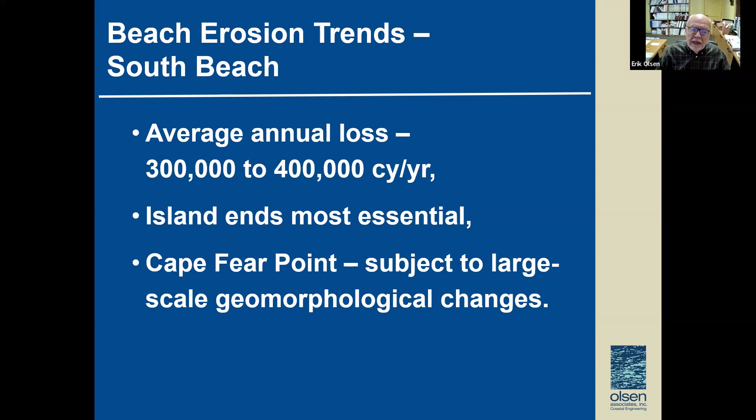Both ends of the island are the most essential, historically have been the areas of interest where we've had to evaluate erosion control. Cape Fear Point being the most recent, and the changes there are natural. They're very large scale, and they're what we call geomorphological changes, which have to do with the morphology or the geology of not only the landform itself, but in this particular case, Frying Pan Shoals. Next slide.

Just to give you a little bit of history as to why we've had changes on the island. Most of this has to do with the initiation of the Federal Navigation Project through the Cape Fear River. In the 1800s, the project was initiated, but before it was initiated, we literally had a sand sharing system that existed between Oak Island and Bald Head Island, which you can see here, which is denoted by the very shallow shoals. And again, on the right-hand side, you can see that the shoals have been diminished over time, both naturally and through man-made operations.

For example, the maintenance of the channel itself. Historically, before about 2000, all of the material that came out of the channel in order to keep the federal navigation project navigable was taken offshore and was dumped. And so there were several tens of millions of cubic yards that were taken out of the system by the federal government prior to 2000. Next slide.

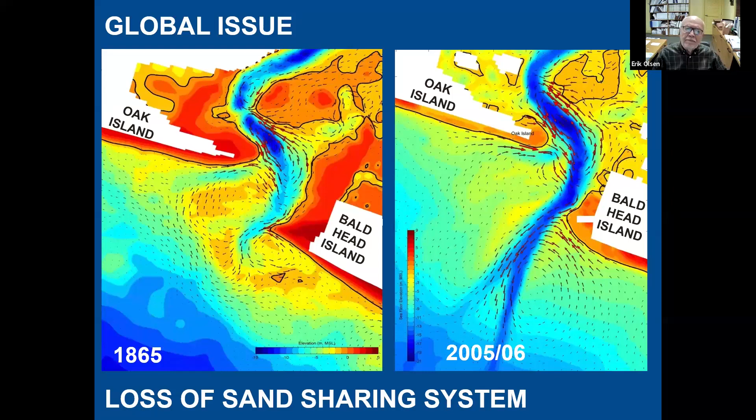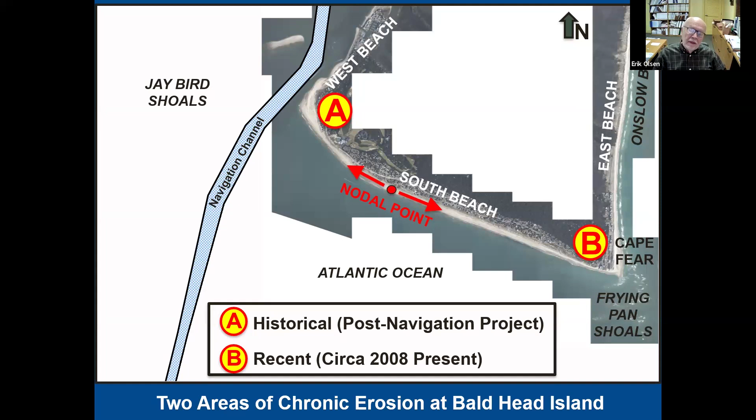So if we look at the conditions today, historically, the area of interest has been in the vicinity of the navigation channel. That's because we have both natural and obviously man-made changes at that location. More recently, since about 2008, we have been suffering an erosional hotspot on the east end of the South Beach, literally at Cape Fear. Next slide.

On the west end, obviously, over time, there actually were structures that were lost, including a former club facility, in addition to a number of homes that were either lost or relocated more landward. Next slide.

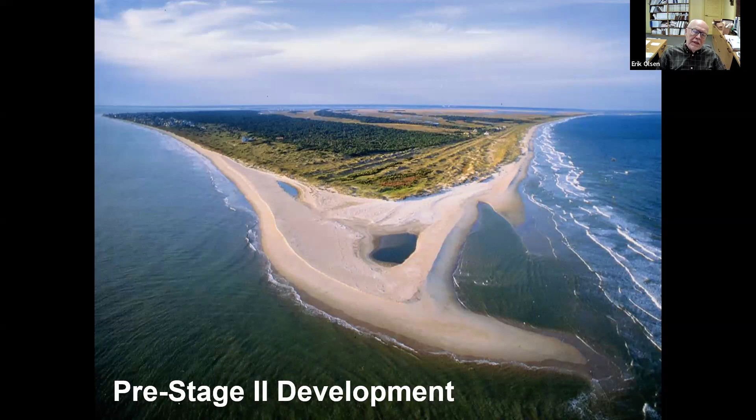On the east end, prior to the development of the club, we had a very anomalous accretional formation, which looked like this, which has disappeared over time. It's a morphological change associated principally with whether the Frying Pan Shoals formation, which extends from here offshore, extending 30 miles southward, whether that formation attaches to the land or tries to attach to the land, or is segregated from the land due to a marginal flood channel, which becomes deepened over time during storm events. Next slide.

Well, just to give you again an overview, which most of you know, with respect to the large-scale benefits of either nourishment constructed by the village or disposal events, which is tantamount to nourishment that occurs as a result of the U.S. Army Corps of Engineers placing sand on South Beach derived from the maintenance dredging of the navigation project.

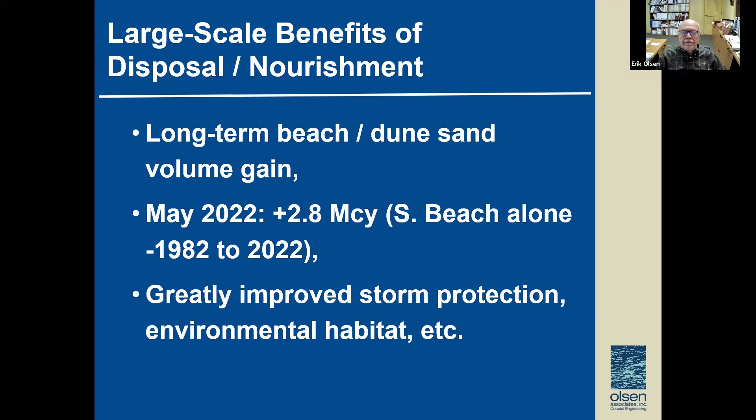So if we map the infusion of sand over time, as represented here from the beginning of about 2001, which is when the Corps of Engineers performed the last channel deepening, a large quantity of sand, almost 1.6 million cubic yards, was placed on South Beach from that construction. The remainder of the construction volume went to Oak Island.

So what we do is we map the volume of sand in the beach. You can see that over time it degrades, and then it jumps up again with some type of infusion, be it either a federal project or a village project. The most important thing to take away here is the fact that this whole trend is moving up.

And that's the sign of a very successful beach nourishment project or beach management program, where the quantity of sand in your system continually increases because you're putting more sand into the system than you're losing, either naturally or through man-made features such as sand loss to the navigation project.

Included in that are, of course, the terminal groin construction and also the reconstruction of the sand tube groin field, all of which helps maintain the sand on South Beach, particularly at the west end of South Beach in proximity to the navigation project.

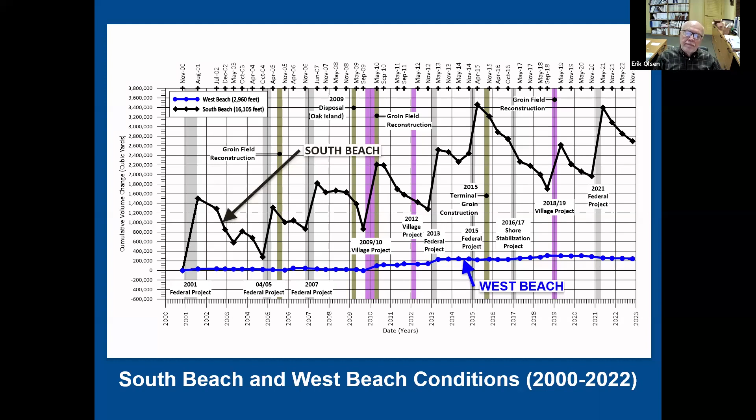So as Chris noted, we have a fairly in-depth sand management plan here, which is probably attributable to the Wilmington Harbor Sand Management Plan, which began in 2000 as a result of, quite frankly, the Village of Bald Head Island's insistence that sand management had to occur in the future. That is to say that sand could no longer go offshore and it had to be put back into the system of the two barrier islands that border the navigation project.

So the federal project was the genesis for your beach nourishment project, which began in about 1982. And over time, as we'll show you in a second, a schedule for sand placement has evolved. Now, simplistically, we've alluded in the past to the fact that your management plan is akin to a three-legged stool. One leg is structures, another leg is federal disposal of sand on South Beach, and the third leg is local nourishment, or projects constructed by the village itself as required. Next slide.

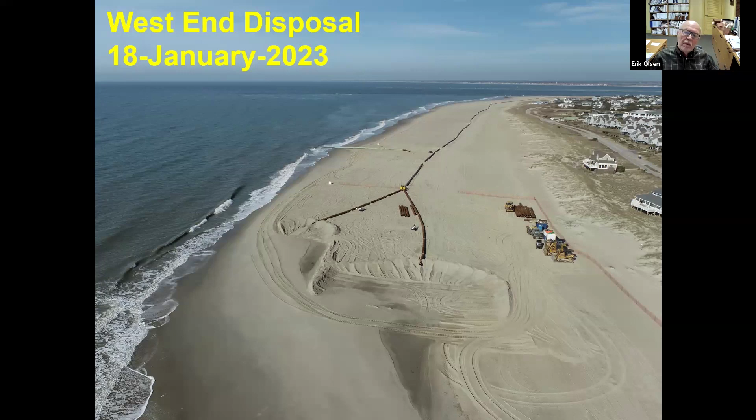This is just a view of the way that the sand is dredged. This pipeline extends back to the navigation project, and you see here the type of process that's used to construct the berm on either the federal project or even your project. It's basically identical. So the beach is extended seaward some distance, depending on whether it's a federal project or it's a local project. And once that seaward berm is met, the berm then extends in an eastward direction. Next slide.

Now, with respect to how far this sand goes, historically, due to the design of the federal project, they only get about 60% of the way down the shoreline towards Cape Fear. And again, the reason for this is that they maintain the least cost methodology with respect to the government budget available. That is to say that to place the sand further to the east would cost more money, and their charge is to do the maintenance dredging in the least cost manner possible.

So their goal is not to construct beach nourishment here. Beach nourishment is a sidebar. Their goal and their charge with respect to Congress is to maintain the channel, and so the least cost methodology is utilized with respect to disposal.

Now, there's one occasion where actually sand was placed all the way to Cape Fear. And that was back in 2001 when they did the channel deepening project. And so by design, and by the insistence actually of the Village of Bald Head Island Council at the time, the fill extended all the way to Cape Fear, all the way down basically to the club. There's actually a story with that, but I won't go into it because it almost did not occur.

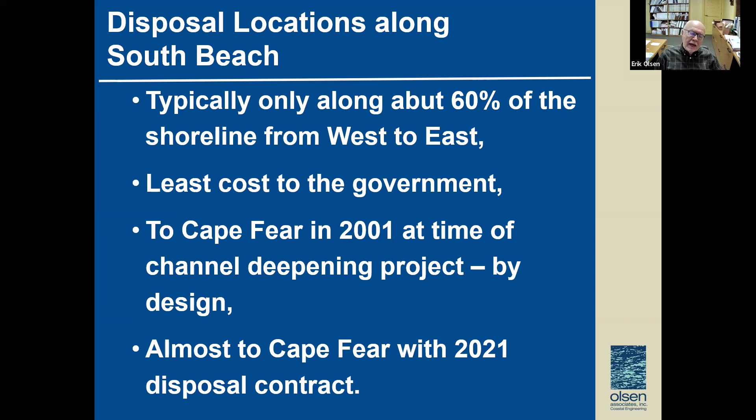But the village politically insisted that the Corps meet that goal because they had alluded to meeting that goal in the planning of the project in the early stages. In 2021, the navigation channel had more than 1 million cubic yards available, almost 1.5 million. And so the Corps did extend the disposal at that time. It almost got to the club, but it petered out just before that. Next slide.

Coming up is the next village project to be constructed on the west end of South Beach, basically in 2025. There are two other actions here that are being addressed. One is to replace the sand tube groin field, which we normally do about every 5 to 6 years because the ends of the tubes wear out due either to impact from boats or just natural erosion of the tube itself due to its being in the active surf zone. And also an attempt to address the chronic erosion at the eastern part of South Beach near the Shoals Club. Next slide.

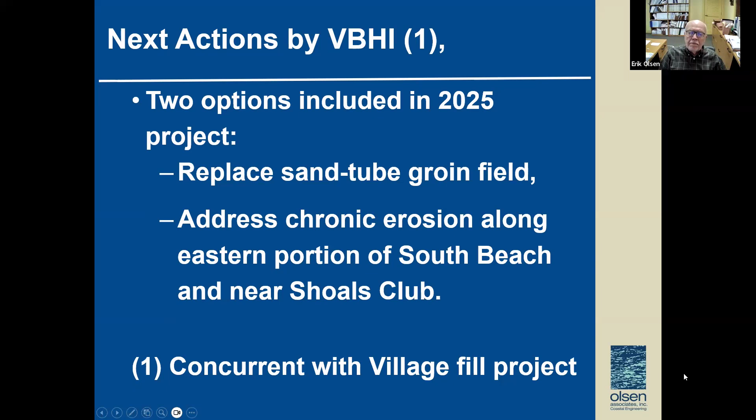Now, the sand tube groin field functions actually in concert with the terminal groin, and it protects both the road and the infrastructure at the point on South Beach where there is curvature in the shoreline, where, associated with that, there's actually an accelerated sand transport. So the goal of the sand tube groin field is to slow down that sand transport, to keep a dune in place, and to protect both the infrastructure and the road itself. And of course, there is subgrade infrastructure in proximity to the road.

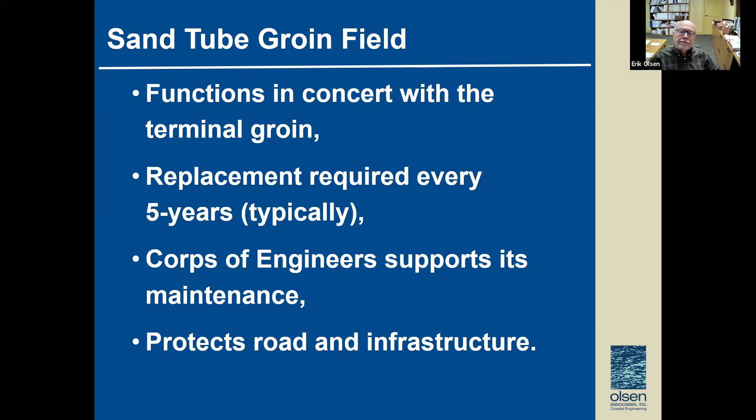This is an action that is supported by the Corps of Engineers because they know that when we slow down the transport of sand in this vicinity, it reduces the maintenance of the navigation project. Next slide. Next. Oh, sorry.

The construction of the groin field is pretty unique, and that is to say that it's constructed in the dry. That means that we really can't construct these sand tubes out into the ocean in the manner that we'd like. So every time it becomes time to episodically replace the groin field, it's done in concert with a beach fill. And as you'll see in the next slide, we literally excavate out the old groin and replace it with a new groin, new sand tube in the dry, and then we bury it.

We're back to utilizing Jaybird Shoals borrow site. And there's a story with that we'll get into in a second. But that's a necessity, particularly if the village is building their project, in order to build a beach fill sufficient to replace the groin field. If the Corps of Engineers is not doing it, then the village is required to do it. And part and parcel to that typically is the replacement of the sand tube groin field.

So in order to do that, we obviously have to have a competitive situation for a dredging project. And all of these actions, both the beach fill and the groin field, are permitted functions or features. Next.

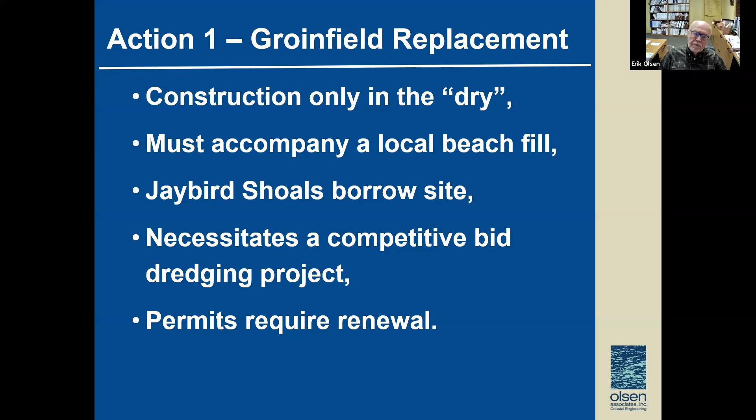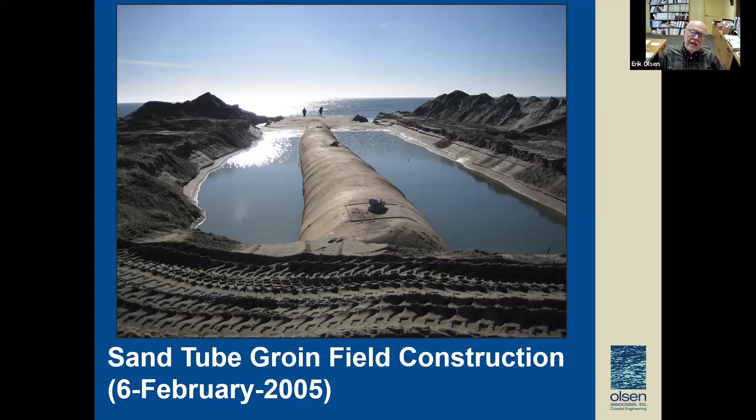So again, this is a view of the tube itself once it's exposed. This is a new tube that's been constructed. You see it's in the dry, although the water is pumped down as required. It's the water table you see there. It's pumped down as necessary to implement the construction of the groin. Once the groin is constructed, we backfill it. It's covered over. You don't see it. The only thing you see, usually a year or so after the fill has been placed, is the tips of the groins will then become activated. Next slide.

So the second action that we're talking about here is the consideration of placing sand near the Shoals Club on the east end of South Beach. We're attempting to do this in a manner whereby when we go to bid for a dredging project, we will have a base bid, which will be the west end of South Beach. And we'll have two options for placing sand on the east end of South Beach, which gives the village council the ability to control costs.

Now, in an ideal situation, we had intended to use Frying Pan Shoals for this particular project and for the upcoming sand placement on Bald Head Island. We actually initiated, as you'll see in a minute, permits almost 8 years ago in order to do that. And the reason we wanted to go to Frying Pan Shoals is, one, it's an infinite source of sand. Someone has computed that in its entirety, although we would not dredge large distances within Frying Pan Shoals, there's like 1 billion cubic yards of material out there.

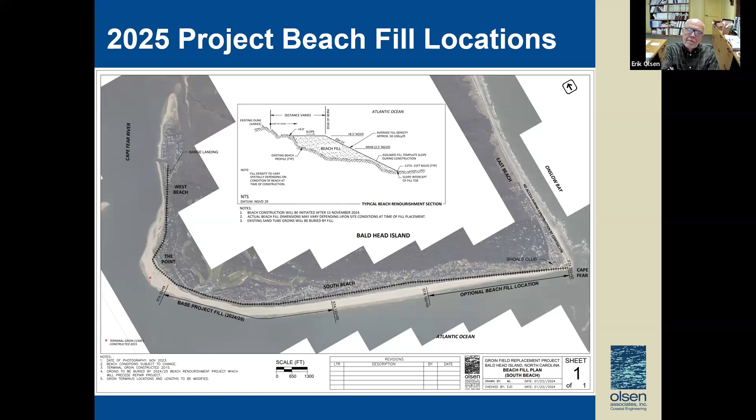Next slide. So what we were told to do in the permit process, when essentially we determined that the fisheries groups were going to oppose Frying Pan Shoals, we were told to go back to Jaybird Shoals. And the nuances associated with that sand are twofold. One, it's a finer sand, much finer than Frying Pan Shoals. And so we're back to placing a material which is slightly less desirable or less optimal compared to the Frying Pan Shoals material. And also the additional costs associated with the pipeline length.

So we're dealing with several miles of additional pipeline, which figures into the options and figures into the costing of those options. And it's not just the pipeline length itself, but as you might imagine, the longer the pipeline gets from the borrow site to where it's being placed on the shoreline, the lower the productivity of the dredge because of just the frictional aspects of the pipe itself and the sand and the effluent going through it. So the productivity of the dredging contractor goes down. That's to say the number of cubic yards he can place per day goes down, and effectively the cost then of each cubic yard goes up. Next slide.

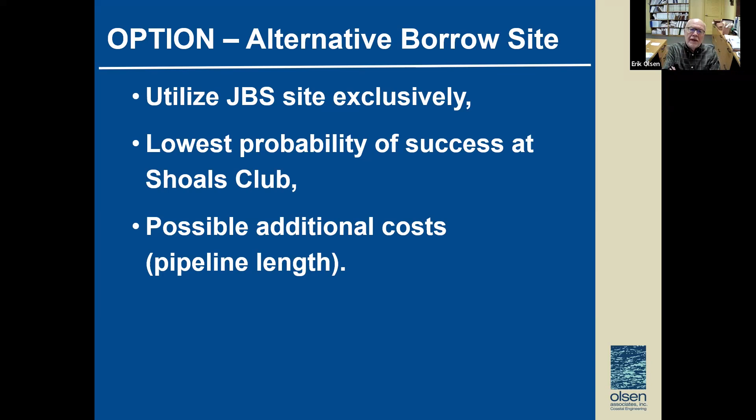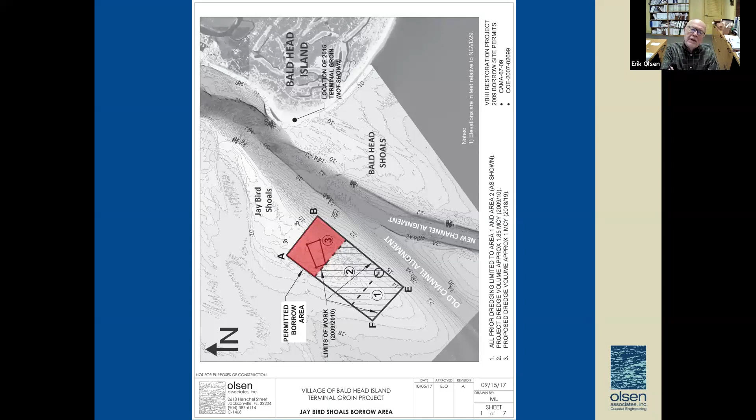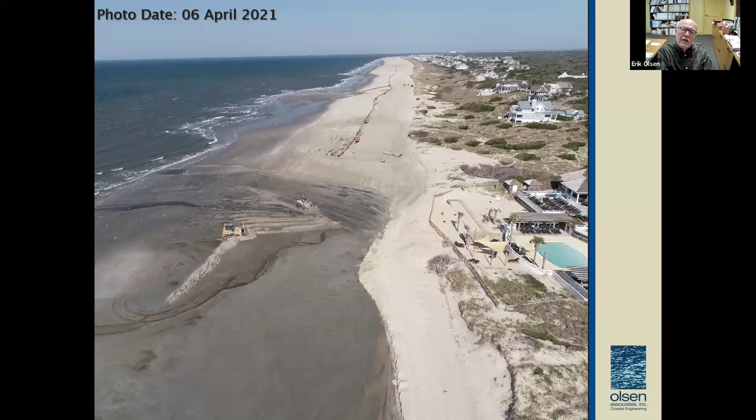This is a view of how far the Corps got in '21 with their maintenance dredging project. They almost got to the Shoals Club, but not quite. And so this is essentially how it ended up. You can see here the contractor trying to push up material towards the dry beach, which he effectively did. But the fact of life is that the material that was placed here came out of Bald Head Reach 2 and is the finer material that comes out of the navigation project. So besides the shortcoming, we also had material that was placed with a very fine grain size, which again portends poorer performance with respect to nourishment. So even though material was pushed up here in the short term, that material was not very long lasting. Next slide.

So the rhetorical question that has continued to come up: what are the options for solving the problem at the Shoals Club and the Cape Fear vicinity? Well, one potential option is the channel maintenance that is performed every 2 years and is placed episodically on Bald Head Island. The way that would occur, which means that the Corps, instead of placing all the material on the west end of South Beach, would place some on the east-south end of South Beach, will require negotiation and some form of contract between the village and the Corps, with the village being responsible for paying for any delta costs. So instead of the least cost option being constructed, there will be another option constructed whereby there's an additional cost, and that cost would have to be defrayed by the village. And the village is presently in the process of trying to negotiate such a flexibility into the federal contract.

Another upcoming event, which we don't know when this will occur, is the planned harbor deepening and the expansion of the navigational channel in proximity to Bald Head Island, both vertically and horizontally. So what that means is that when they deepen the channel, just as in 2000, there will be a fairly large quantity of beach quality sand available for placement on Bald Head Island and/or Oak Island. And so at that point in time, depending on the volume available, there may be availability of getting sand all the way down to the east end of South Beach, similar to what occurred back in 2000 with the last deepening project.

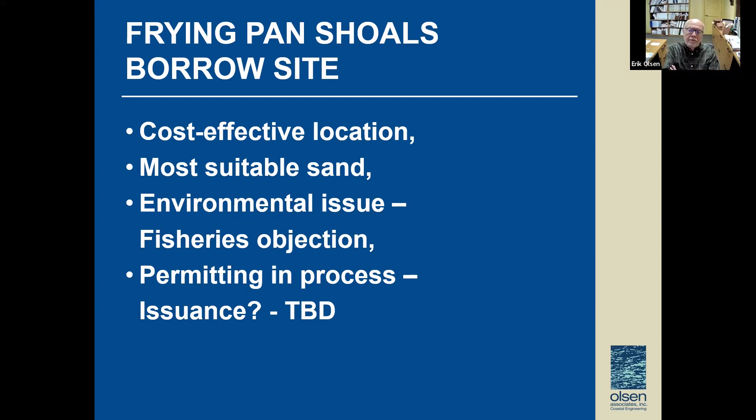And so we intend to go back into the process of reinitiating the permitting. At the present time, we were forced to terminate the permitting of that and to renew the permitting of Jaybird Shoals. Next slide. Can you give us a little more insight into what the objection from the fisheries is?

Well, they believe that it has, and again, I'm the engineer, not the environmental guy. They tend to believe that it has unique attributes with respect to certain types of fisheries during certain times of the year. It's not well explained. Quite frankly, we believe that what they don't want to do is open Pandora's box with respect to utilizing either Frying Pan Shoals or any of the other two.

There are 2 other headlands in the state which have very similar formations to Frying Pan Shoals. And even though I believe the legislature has indicated that these should be evaluated for purposes of sand resource, they believe that these areas are unique. They do not have any quantitative information. Matter of fact, the village volunteered to generate quantitative information to address their concerns through environmental monitoring, through fishery counts, things of a nature that you would do when there's some objection that is not well quantified. But they wouldn't have it.

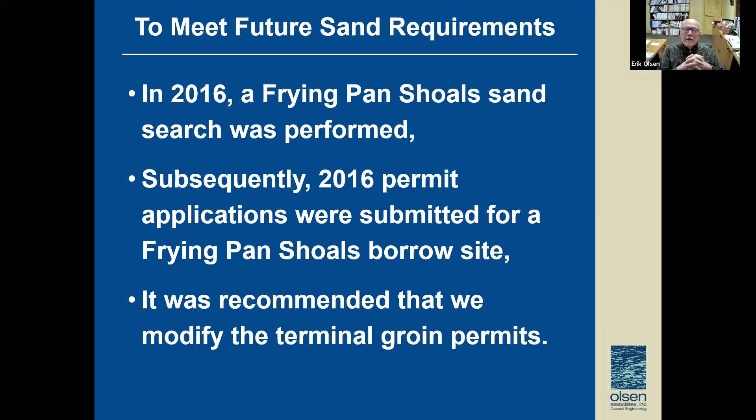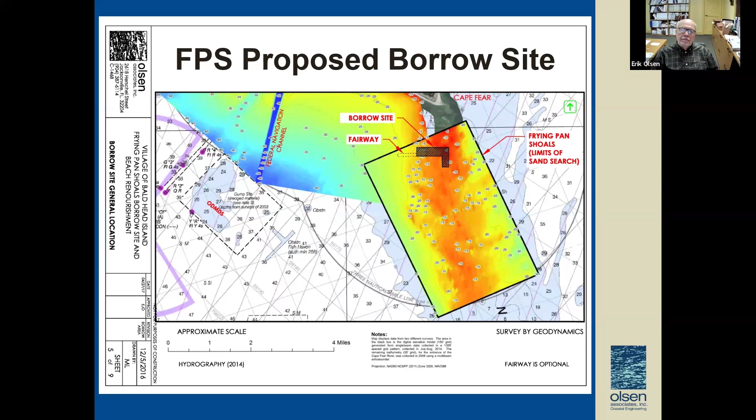So other actions considered by the village. There's been discussion over the years to potentially convert the sand tube groins to rock structures, which at this point in time is not allowed by law. And also to construct some form of a structure at Cape Fear, such as a small terminal groin or perhaps several small groins, to impound sand and to keep sand on the beach in the vicinity of the Shoals Club.

And again, legislatively or permit-wise, regulatory-wise, neither of these is allowable. So at this point in time, they cannot be permitted. The feasibility of either action is not only questionable, but it's impossible. Now, with that said, the village is taking proactive measures to try to initiate legislation that would allow for these type of actions. And Charles Baldwin of Brooks Pierce is heading up that effort.

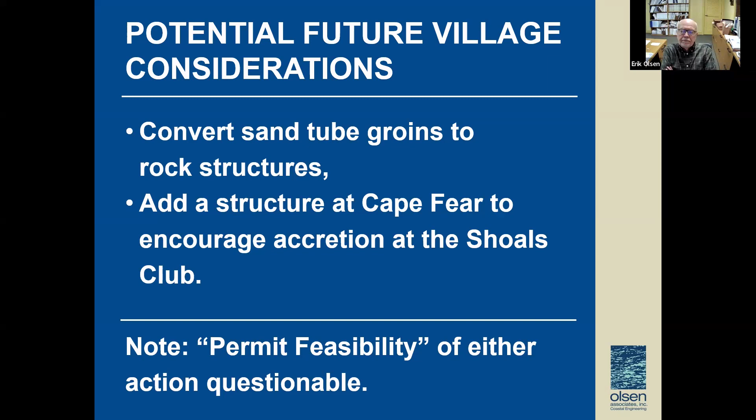It did not get considered last year, and it's my understanding from conversation with Charles that it's going to be proffered again this year in order to try to get the regulatory permissions that allow for these type of actions on South Beach for obvious reasons. Next slide. And with that said, be glad to answer any questions or to fill in any blanks, areas that I may have omitted.

Yeah, Erik, one of your early slides, you were showing the West End and South Beach, and over the course of 20 years, with the constant adding of sand to the system, the baseline is rising. When we're looking at the east end now, down by the Shoals Club, you're looking at at least the possibility of adding sand down there. In the long run, we need to be adding sand, I'm projecting on this.

If you're taking the same approach, you'd have to be adding sand to the system on East Beach on a regular basis as well, unless we start getting a new terminal groin or we get a groin field put in. Is that correct? So the intention of this 25 plan is to start doing that, adding sand to the system so that we would have a rising baseline on the east end as well.

It is. With it being understood that into the future, it's also a fact of life as to whether or not you can afford to keep sand down there, which all depends upon the performance of what is constructed in 25. We know what happens on the west end of South Beach, but we do not know what the performance of either of these fills, be it 250,000 cubic yards or 500,000 cubic yards, will be.